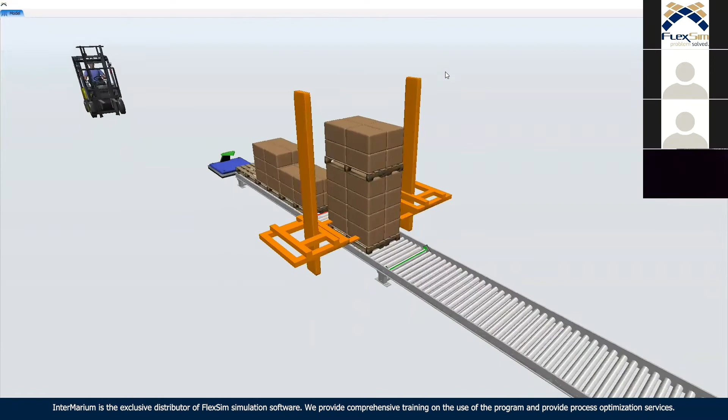Today we're going to do an automatic pallet stacker, load pallet stacker, as you can see on my screen. We'll do it step by step with the process flow, and later we'll post this video on YouTube so you can review it, of course if everything goes well.

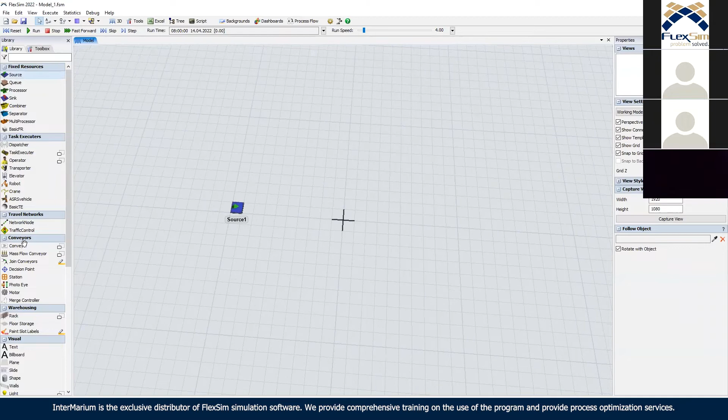So we want to do the load stacker. Let's start from the basics. We'll start with some source, with a conveyor. We'll make some connections, and in our model, we need to have pallets.

So we'll create the pallet in our flow item bin. This icon here on the top, go to the pallet. Let's change it to the Euro size pallet, because Flexsim is an American software, they have the US pallet, not the Euro pallet.

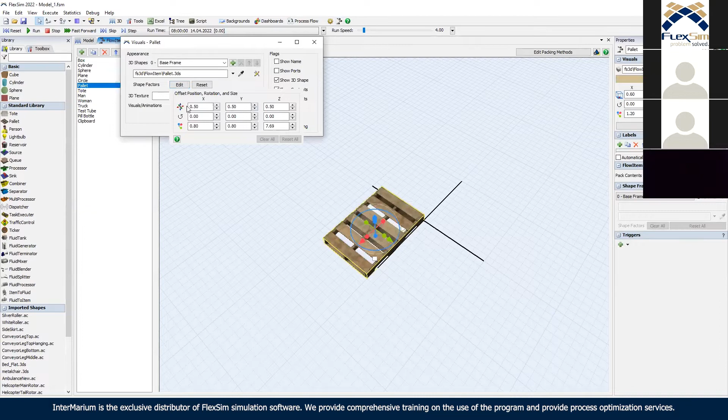Here you can see that when I shrink it, the planks are in the wrong direction. You can easily change it by going to the more visual and editing the shape factors. So you edit the shape factors, and I can rotate it by 90 degrees. Now the planks are positioned correctly.

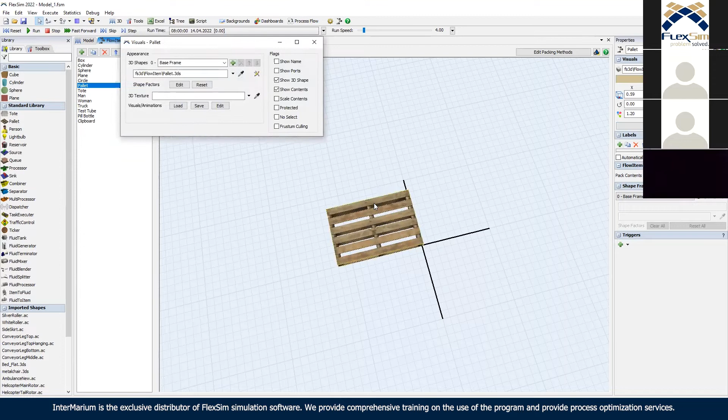By editing the shape factor, you are changing how the 3D shape is positioned inside the frame. The frame is this yellow outline. If you change the size, you're changing the size of the frame, and with the shape factors, you can move the shape freely inside the frame. So now we have our pallet.

Now that we have the source, we can change the flow item class to pallet. I also check arrive at time 0, so I don't have to wait for the first pallet to arrive. So we have the pallet.

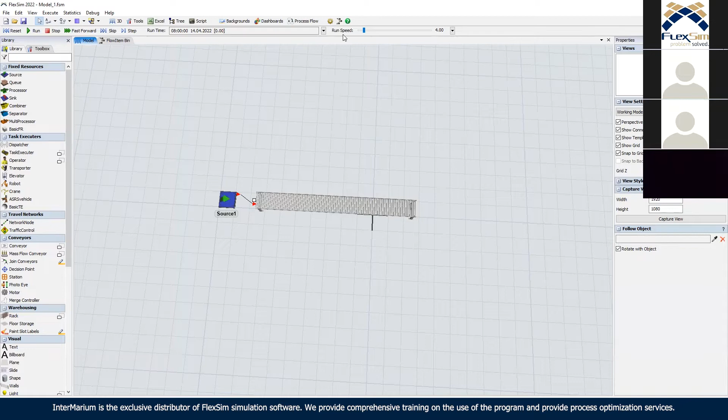In our case, we want to stack those, so let's create this pallet as a pallet with the load. I want to have the full pallet, not the empty pallets. So let's write some logic in the process flow. For example, whenever a pallet passes through this point, through this decision point, I want to create the content of the pallet.

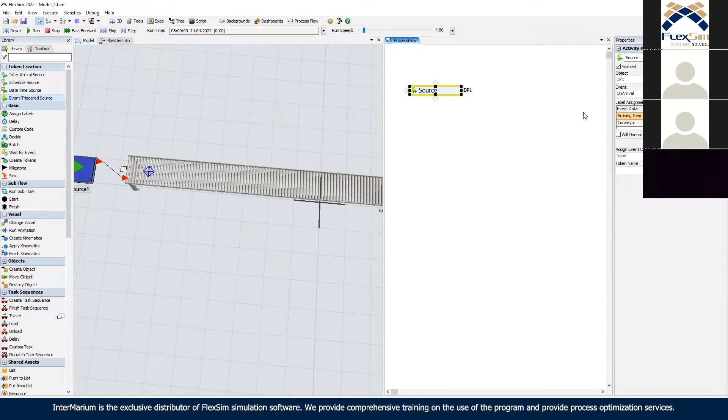So we'll use here the event triggered source. We sample on the decision point, so when something arrives at the decision point, the arriving item, let's call it pallet. So whenever it arrives, I want to create some objects, and it's going to be the content of the pallets.

So I will create some boxes. From start, let it be 8 boxes, and I want to create those on the pallet. I don't need to do anything else with them later, so I don't need to assign it. In the end, we'll use the sink to destroy this token. So now when I reset and run it, I will create the content of the pallets.

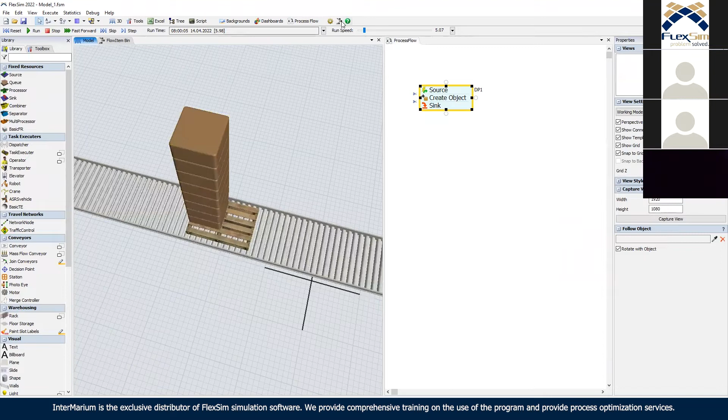These boxes are shaped a little too big to fit on the pallet nicely. So I will go back to the flow item bin and change the size of the box to 59, 39, and let's leave it at 0.3. With this size, they should fit nicely on the pallet, like 2 even layers.

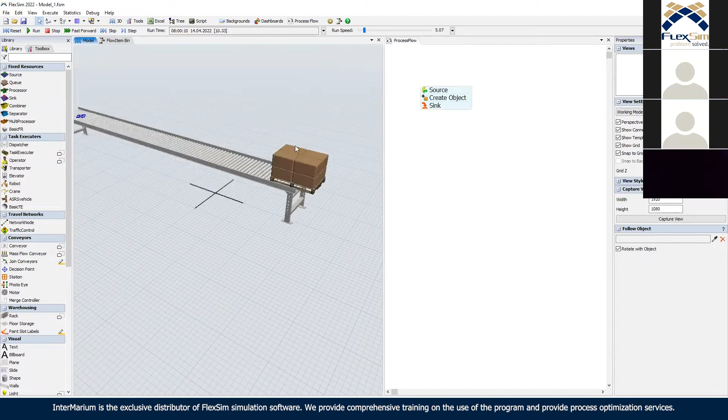Of course, it's important because if I want to stack those, I need to have an even surface that I can stack this on. You need to look out, you need to be careful. If you use a decision point like this, you have to specify here

when the on-arrival trigger fires. So if this is the center, if the pallet moves, if I reset and run this, you see that this logic will fire only after the center of the pallet hits the decision point. This is important because sometimes when you reset and run, in this case it's not a problem because it starts from the beginning, but if you have, for example, a transfer from the side, like here, the center will never reach this decision point. So you have to change the edge to match your layout. In this case, this will be all right.

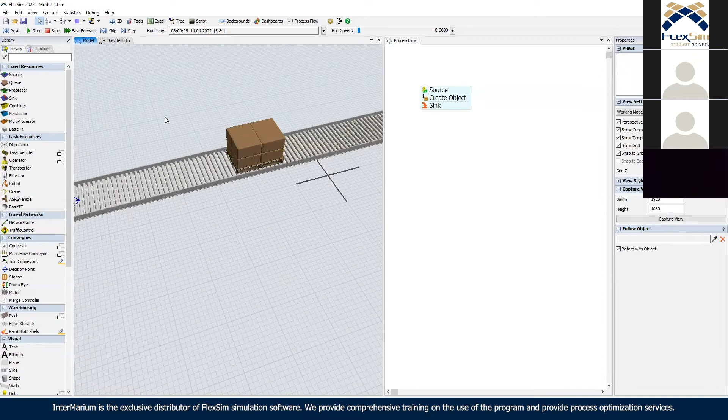So I have eight boxes on the pallet, and now I can start making the stacker. Let's do it, for example, here.

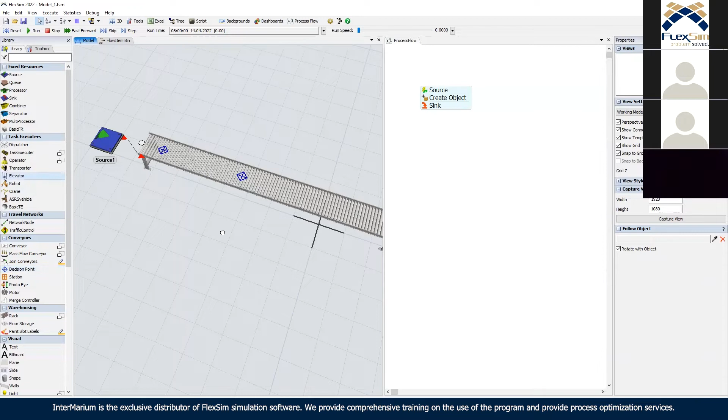So what I need is some kind of decision point where the stacking will take place. In this case, we're going to make the stacker from the elevator. Of course, there are many different ways to do it, but I think this trick with the elevator is the simplest. So let's change its size to be a little more narrow.

We'll move it here. I'll also make this conveyor a little lower, so the leg will be like 0.3 meters, and also change the Z to 0.3.

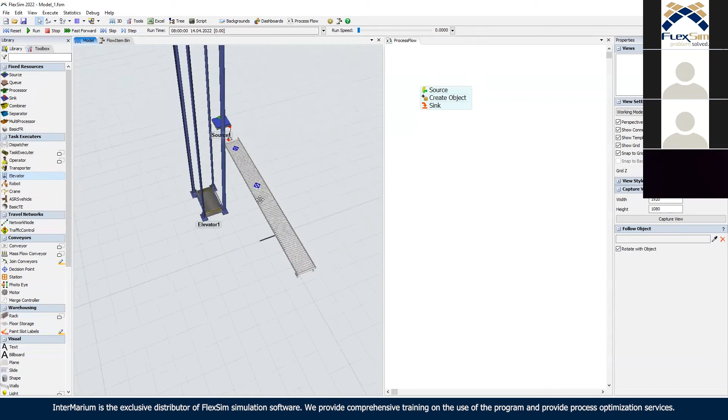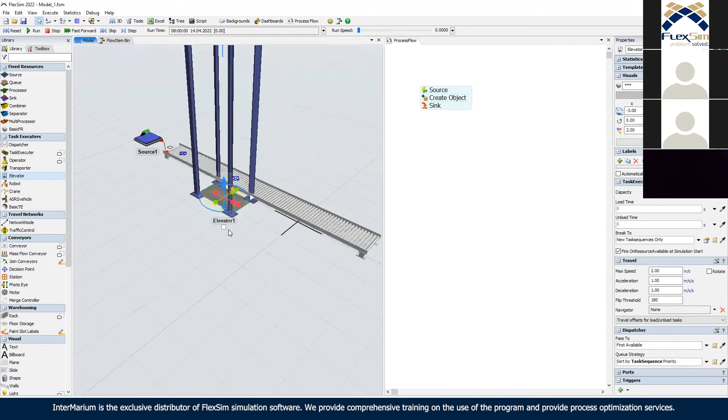Okay, we have the elevator, and we have to make the gripper from both sides. How can we do it? In this case, let's do it with the animations. We're going to name it stacker, and go to the animation options.

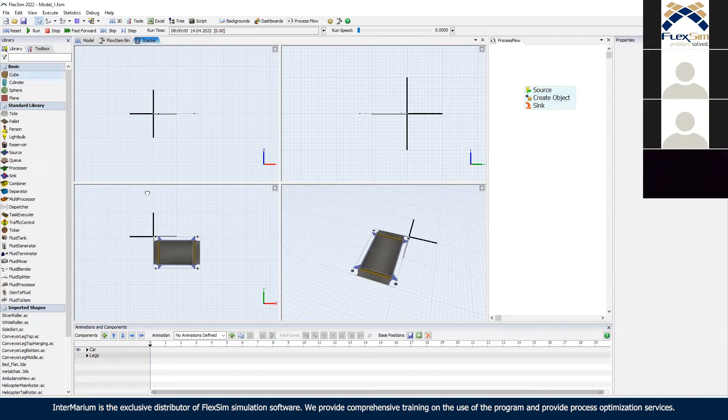Click on the stacker, more visuals, and animation, edit. Here you can create the animations for the stacker. I don't want to see its legs, so I can just click on this eye so it's not shown. And I'll have to make these grippers, so I will drag and drop 2 cubes, and this is important - I will drag those onto the car, so you can see those cubes, those grippers will be part of the car.

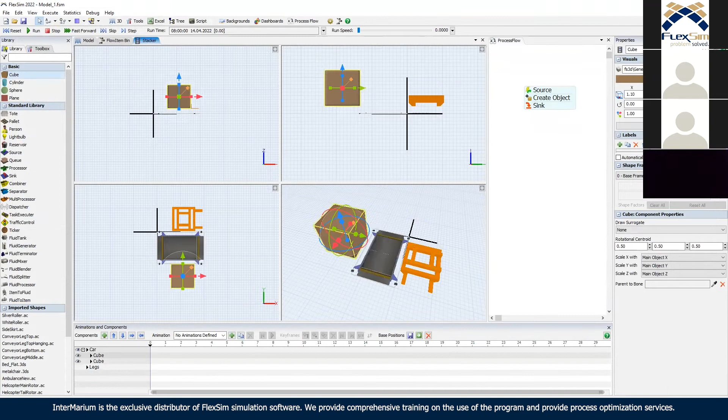So when the car moves, those 2 objects will also move with the car. We change the shape to some grippers, and of course we'll rotate it so we can catch the pallet when it arrives here.

So you can see on the model, you already see the elevator with two grips. So you can say it like this. What we want to do is slide them onto the pallet so you can take it and lift it up. So this is, let's say, the base position.

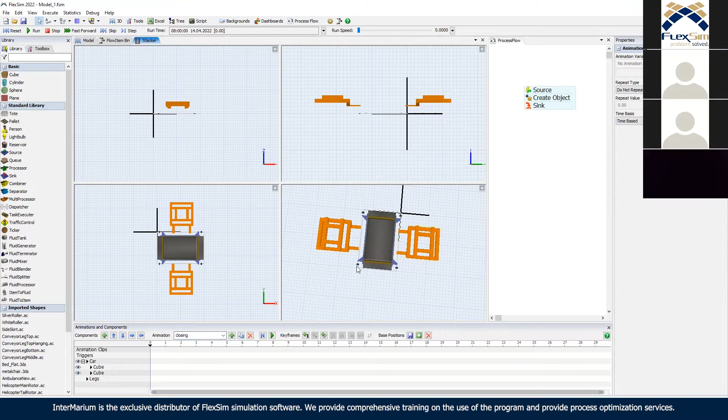Maybe make it even, okay? So we'll make it as a base position. I will save it - this is my base position. I will create one animation, let it be like closing. So I'm closing the grip on the pallet. So I have 2 keyframes.

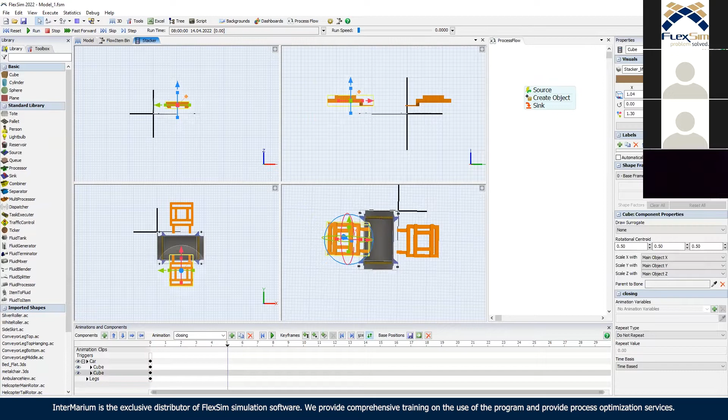This is the first keyframe, like in the base position. And for example, after 5 seconds, I will move it by Y, let's say for 30 centimeters. So 1.6, 36, and here 0.23. And I will save it. So this is some animation for closing the grip onto the pallet.

This is the first animation. Let's create a second animation. But before I do, I will move the shapes onto the closing position. Then when I create the second animation, let's call it opening, I can start with a keyframe. So the first keyframe of the opening animation is the same as the last keyframe for closing. Then at the 5-second mark, I can go to the base position and create a keyframe. So I have the exact movement with the same position for closing and for opening.

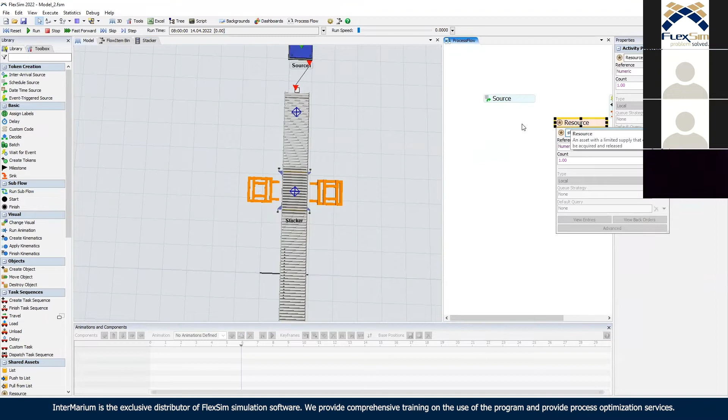Okay, so we can go back to our model, and now let's build the logic for a stacker. We'll start the schedule source, we'll create one token, and we need to have some resource here. This resource, of course, it's going to be our stacker. As a reference, we're going to use the elevator. Later, of course, we will make this platform invisible so it won't be shown, but for now it's easier for us to sample it, to point to it when we see it. That's why it's still there.

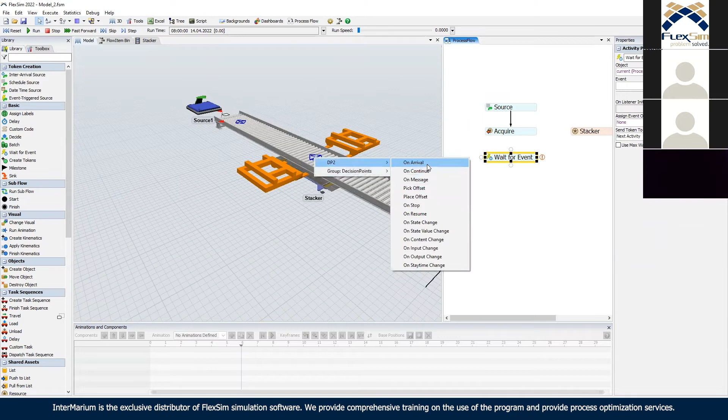We're going to make the acquire, so I'm going to take this resource and let's call it stacker. Okay, and what will be the logic here? We have the acquire and we have to wait for something to arrive at this decision point. In this case, I will name it pallet 1, because I will have pallet 1, the first pallet that I will lift up, and pallet 2, the second pallet on which I will put pallet number 1. So this is pallet 1, and I'm waiting for it to get there.

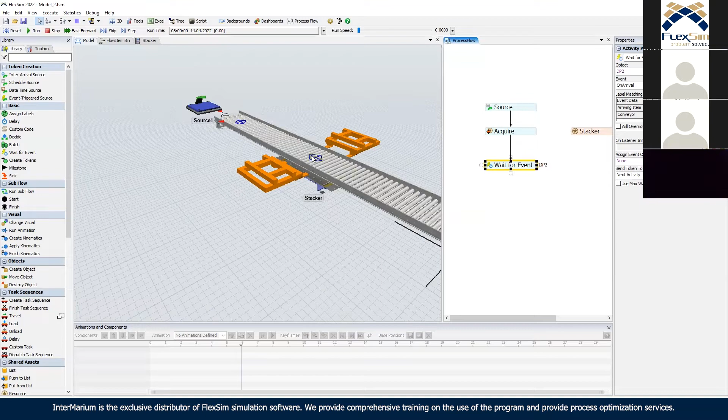When it arrives, I will move this pallet onto the stacker. So I will create a move object here - move pallet 1 on stacker. So my pallet 1 will be moved onto the stacker, and this is what's important - I will preserve its global position.

And thanks to it, if I reset and run the model, when the pallet arrives here, it moves onto the stacker. So right now it's on the stacker, but it still looks like it's on the conveyor. So if I run it more, you'll see that the next pallet, when it arrives, will just go past it, because this pallet is not on the conveyor anymore. It is on the stacker.

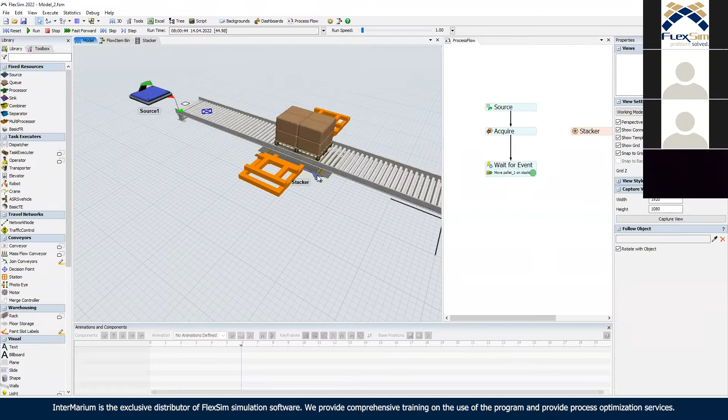So I don't want the next pallet to get here, not before I say so. Yes? So in this case...

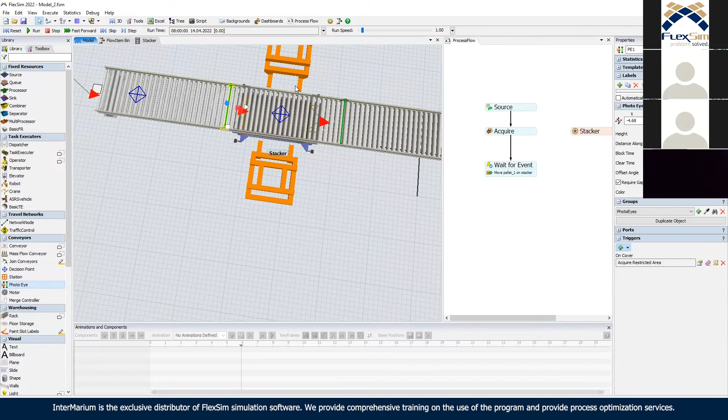I will need to create some area with the photo eye, some zone in which there can only be one pallet. So when a pallet arrives at this photo eye, I will use the logic on cover, and I will acquire the area. The area owner is the current object, connected through the A port with my photo eye. So I will make the connection here. This is the zone from this photo eye up to this photo eye.

So right now, if I reset and run it, the first pallet gets here, and the second pallet will have to wait at this point, at this photo eye, because I didn't free the area or the zone. So it waits here. Now I can do all sorts of manipulation with my pallet.

Okay, I have the pallet in place. It's already on the stacker. The second pallet waits, so I can close the grip on the pallet and I can lift it up.

So let's run the animation. You can have the run animation block here. Let's call it closing. So it's going to be our animation for our stacker, animation number 1. You can reference the animation by name or by rank. So rank 1 means the first animation, closing, or the second animation, opening.

So I can just leave here 1, and I can define also here how much time the animation will take place. If I don't set anything, it will take 5 seconds, because here is 5 seconds. But if I choose use duration off, I can write whatever time I want. So for example, I write here 4 seconds. And I will make the token wait here until the animation is finished, so I don't want to continue my logic, not until I finish the closing.

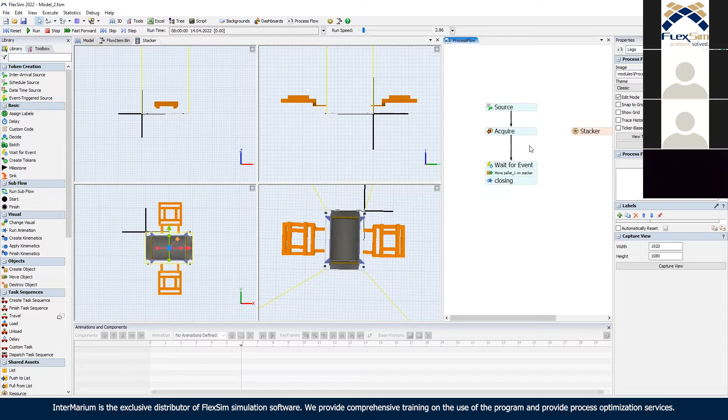So let's see how it works. And I'm closing. I've closed the grip, so now I can lift it up.

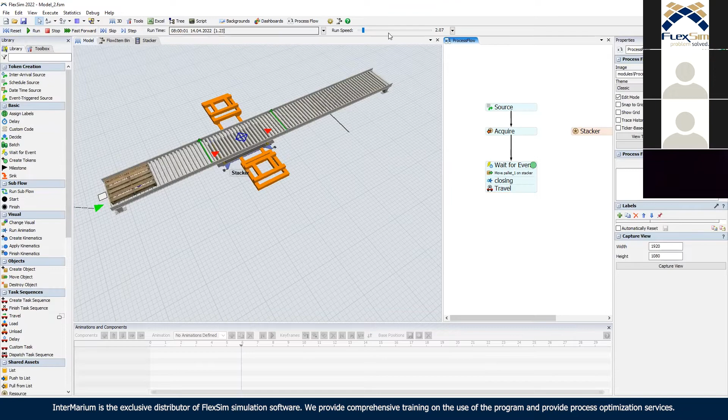So I can use the travel to location to move the elevator, in this case the stacker. I will use the relative option, so I will lift it by, for example, 2 meters. So now after the closing, I will lift it by 2 meters. You can see it's not aligning perfectly here.

So I can make some corrections by increasing the initial height of the elevator. So now if I reset and run, the gripper fits nicely into the pallet. Of course, there's another way to do it, but I think this is the simplest one.

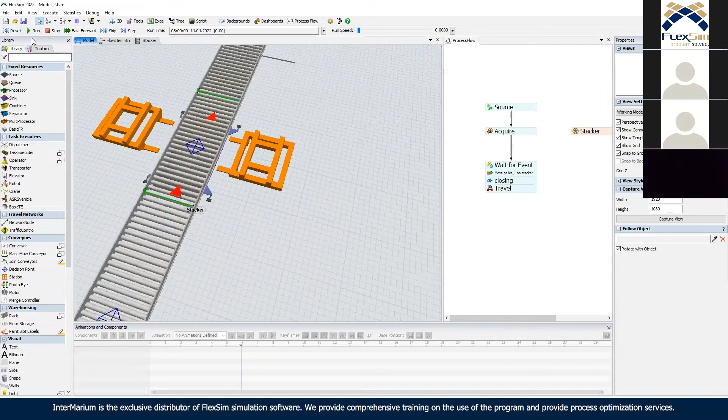So we have the pallet, the pallet is full, the pallet is taken by the stacker, and the pallet is lifted up to this position.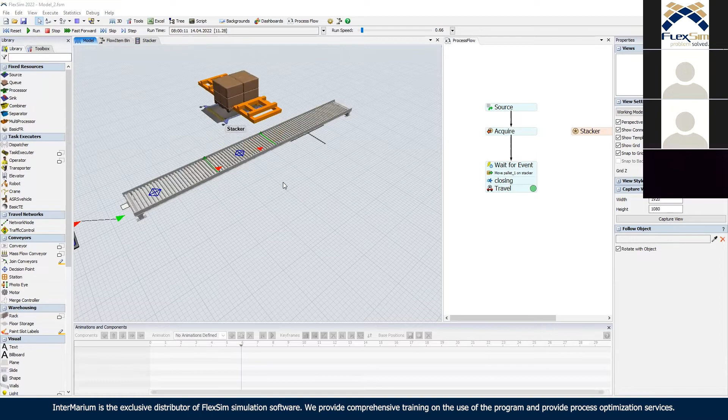Okay, so what we need to do now is let the second pallet come here, because this area is still occupied. This pallet acquired this area, and I've never released it. So after lifting up, what I want to do is release this area, so the next pallet can move up to this position, so I can lower this pallet down.

Okay, so I need to release the area. How can I do it? I can check the logic—for example, here on the second photo eye, on uncover, I'll have the logic to release the area. This is the logic, because when the second pallet moves past this photo eye, I want to release this area, but I want to do it like every second pallet, because I will release only after a stack of 2.

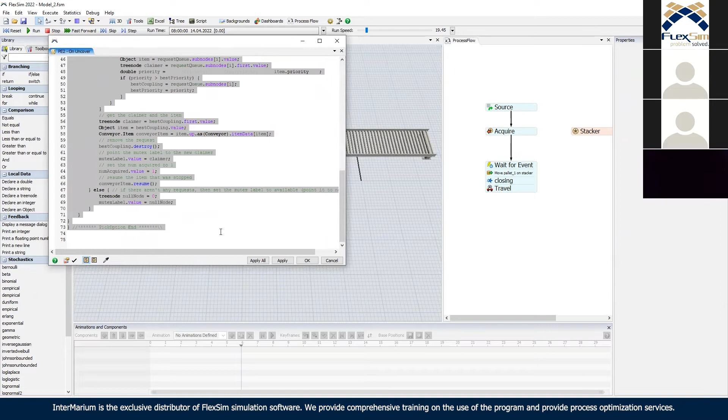So I need to use this code in my process flow, so I can release this area when I lift up the pallet with the stacker. So I can just copy this code from the pick option start to the pick option end, without the headers here. And I can create here the custom code. Let's call it 'release area' and paste this code here.

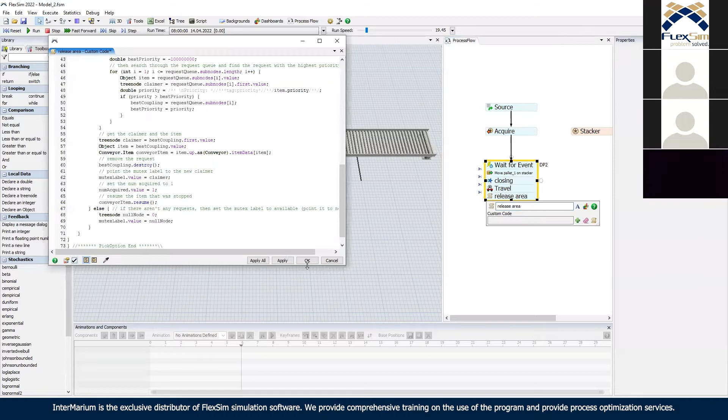I need to specify the area owner because in this case, area owner was current. Current in this case means me. So the object when this trigger, this code is... so this is the photo eye, but in the photo eye, current means something completely different because current means the process flow itself.

So the area owner, I will specify with the simple Model.find. Now if I reset and run it, I move it, the area was released, so the pallet can pass. Of course, I still need to stop it somehow because I want to wait for it, so I can lower the pallet onto it.

So after releasing the area, I will create another wait for event, connect this with the decision point on arrival. But in this case, it's going to be pallet number 2, so the second pallet and assign.

In this case, I won't move the second one onto the stacker because I want the second pallet to remain on the conveyor. So I will just stop it — stop the pallet 2.

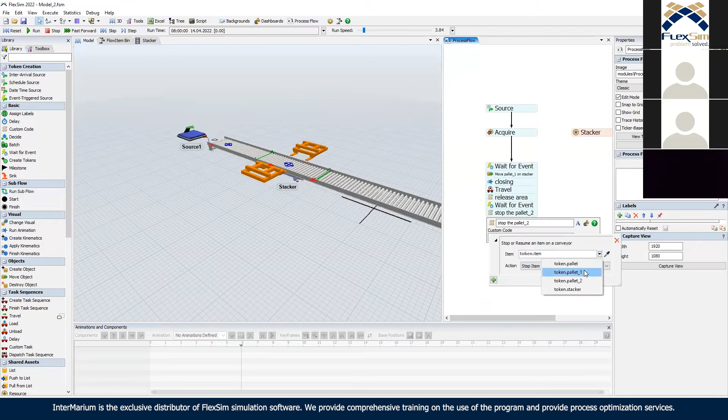So now if I reset and run it, leave the first and the second is here. Okay, maybe I write here, like for example some 20 seconds. I don't have to wait as much time for the second pallet. Okay, so we are here.

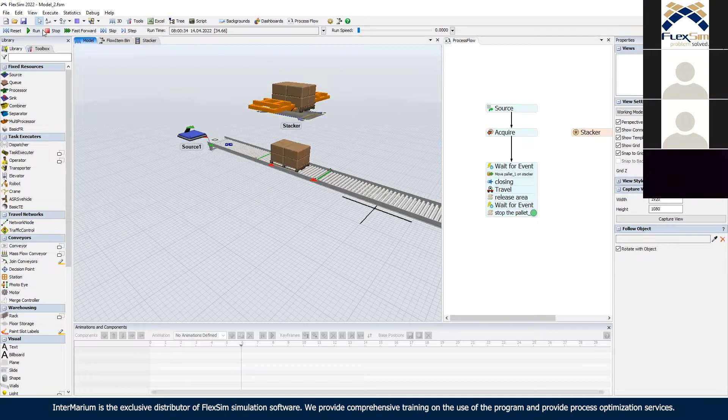So now I have to lower this pallet onto this one. I have to calculate how much space is from this point to this point, because I need to know — right now we have a constant number of boxes on the pallet, so it's all the same, but later we change it, so I'll have some random number of layers here, and I will never be sure what is the height that I need to lower myself onto. So after stopping the pallet, we will calculate the height.

So we use the assign labels to calculate the height of pallet 2. Yes, we have to calculate the height of this pallet. Let's call it pallet 2 height.

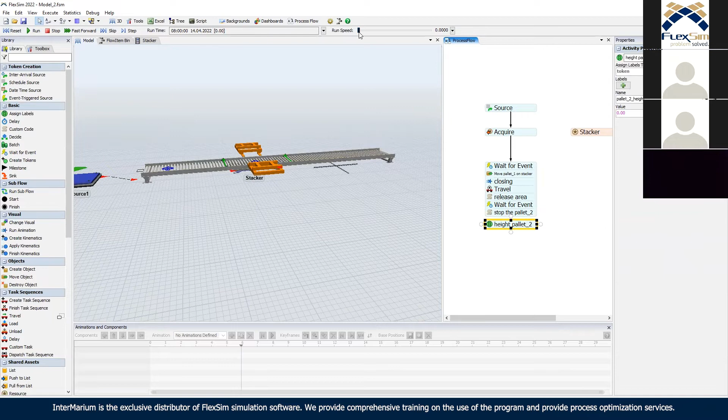And what would be the value here? So I need to get the location, maybe just to show. To calculate the height of the pallet, I need to get the location from any box from the last layer. So this will be the location and the size of this box.

So in this case, it's going to be token dot pallet 2 dot last — this is the last box onto the pallet, so I need to have its location. So location Z, and you can see it didn't color to purple because I need to specify that I want to treat this as an object, so I can have access to the functions and methods from this class. And this is going to be the class.

And the size for Z — so this is the pallet 2 height. Of course, I could also use the get location function to get me the location for this point, but I think for me this is a little bit simpler, so I can use the base functions. Okay, so now I know the pallet 2 height.

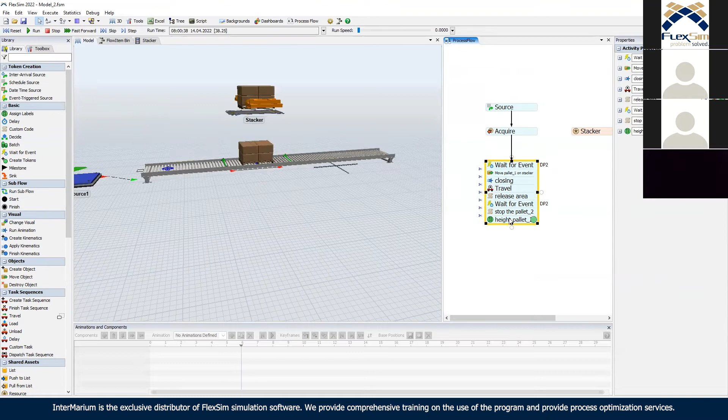So if I reset and run it, I can go to tokens. I know it's 0.73. So I have two boxes: 0.3 this, 0.3 here, and the pallet is 0.13. So 0.3, 0.3, 0.13 — 0.73.

So this is okay, so now I can use the elevator to travel to this location. So we can use again travel to location, so our stacker. Okay, we'll move relatively to the initial location — where I am right now — so it's going to be token dot stacker dot location dot Z minus the height of the pallet.

So token dot pallet dot pallet 2 height. Okay, and we'll see if this works. Reset, save it. We'll see how this works. It won't work as intended, and in a moment we'll see why.

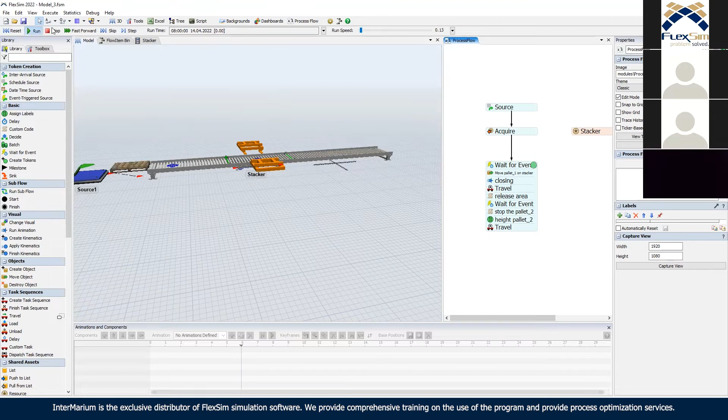You can see it goes higher. Why? Because the result of the equation is with the plus sign, so it goes higher. I want to have it with the minus sign, so I want to go lower. So in this case, I will multiply everything by -1. For example, if the location is 3 meters and the pallet height is 1 meter, 3 minus 1 is 2, so go 2 meters higher. But if I create it with -1, go 2 meters lower, so -2. And we'll see how this works.

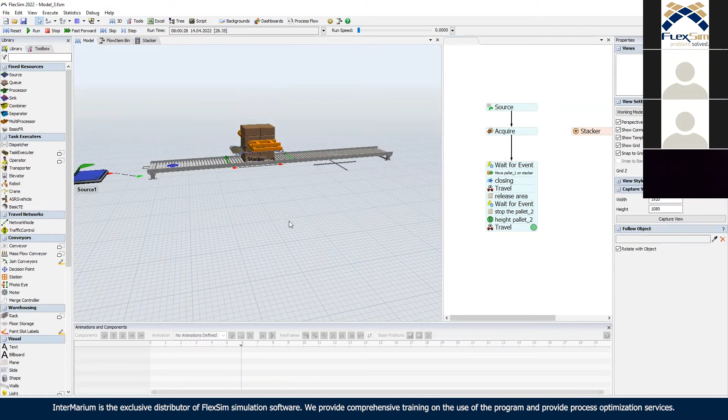And the second pallet. You can see I'm moving myself a little bit too low. Why is that? Because I have some initial height for the elevator, 0.15, and this is initial height for the stacker. So I need to take this into consideration.

So let's put stacker initial height is going to be 0.15. So I need to make the correction here. So plus token dot stacker initial height.

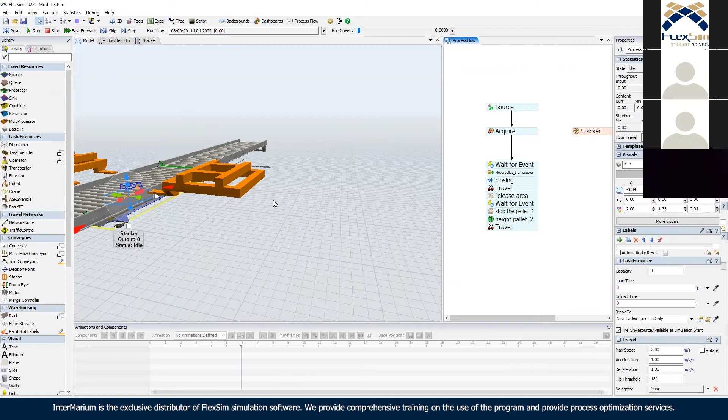So now if I reset and run it, you can see it's the exact position. You could also do it without the relative movement, but in this case the relative movement is a little bit easier, especially when you have multiple stackers on multiple different levels. Yeah, because this is a little bit more universal.

Okay, so I'm in position. I've stacked those, but for now this pallet is still on a conveyor, and this pallet is on the stacker. If you look at the tree, this is the first pallet, and the second is still on the stacker. So this is the second pallet here. So they look stacked, but they are still on two different objects.

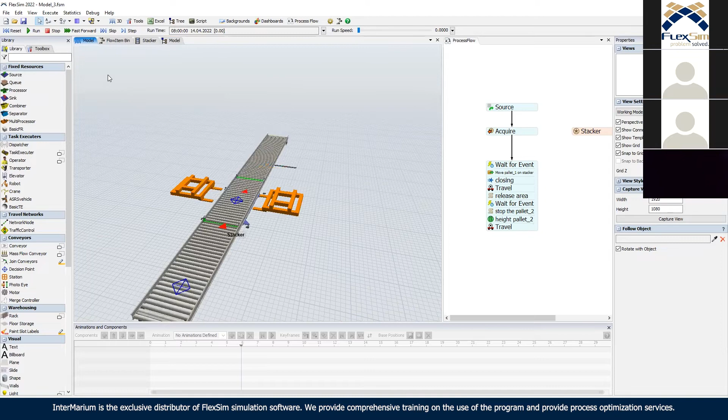So in order for this to work, I need to move the first pallet onto the second pallet. So in this case, again, I will use the move object: move pallet 1 on pallet 2. So I have to move pallet 1, the one from the stacker, onto pallet 2. And again, important, you need to check the preserve global position.

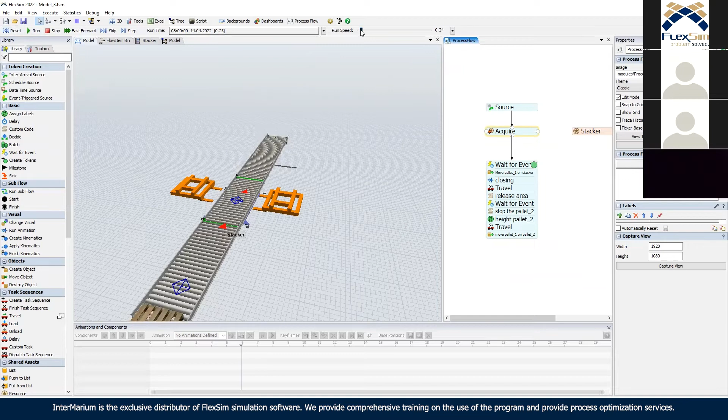Because if you check it, pallet number 1 will remain on the same position, and we position it right on top of pallet 2. So you don't need to do anything else to position the pallet. So if I reset and run it, now when you see on the model, the pallet has 2 pallets and the boxes.

Now we created the, let's say, the tower. We moved it here. So our next task will be to open the grip, to move those 2 grippers. So again, we'll use the run animation for opening. It is going to be for our stacker, second animation, wait until complete, and provide it 4 seconds.

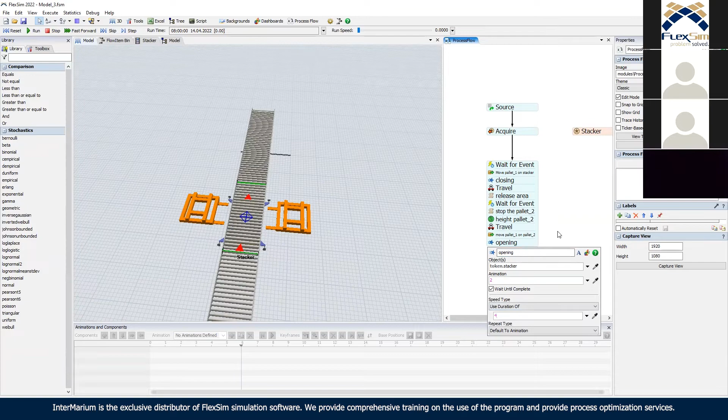So now when I reset and run it, we see the gripper moves aside. So after I move to the side, I can lower the elevator to the base position.

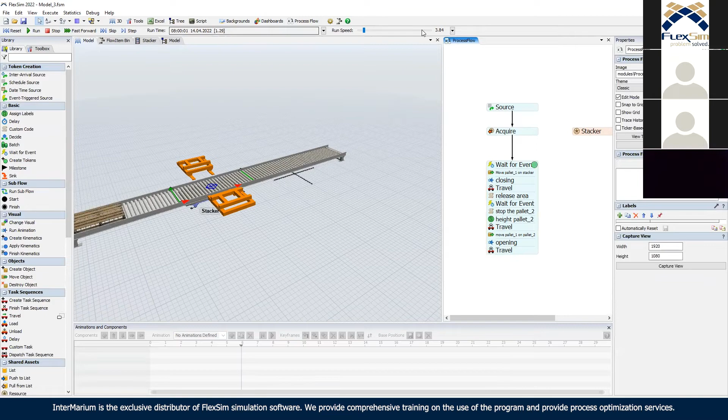So I can again make the travel to location and move the stacker to the label stacker initial height. So now after opening and putting the part, I'm right when I started.

So I'm right there, so I can now release the pallet. So I will use the custom code again to resume pallet 2. So control conveyor, stop and resume item. So you have the pallet number 2, resume item. So if I reset and run it,

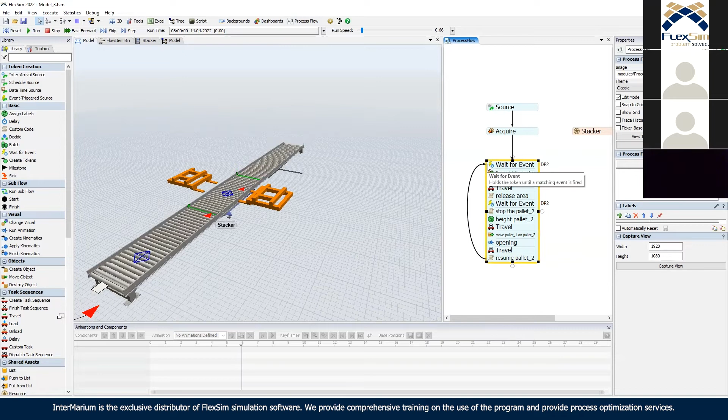I will create a stack and move it. But it won't work for the next pallet because I didn't loop it. So now after I complete everything, I can loop it like this. So I'm again waiting for the pallet to arrive to repeat the cycle. So let's say in one cycle of this resource, I will always take two pallets. So reset, run.

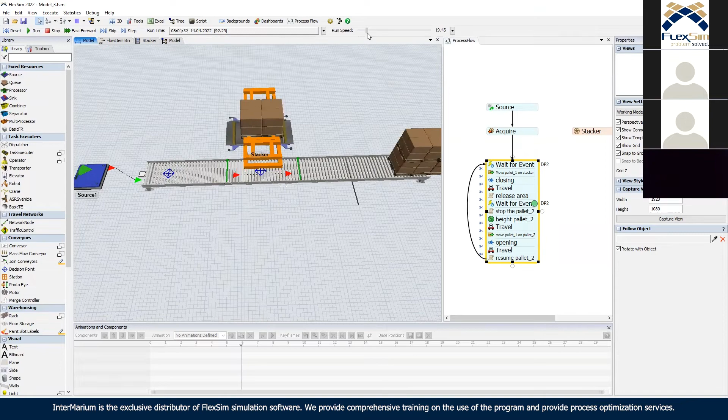Lift it, put it down, grip on positions. And the same. Okay, so we have the base.

Let's make it a bit harder because let's say each of my pallets has a different number of layers. Okay, so we can change the logic here. And let's say

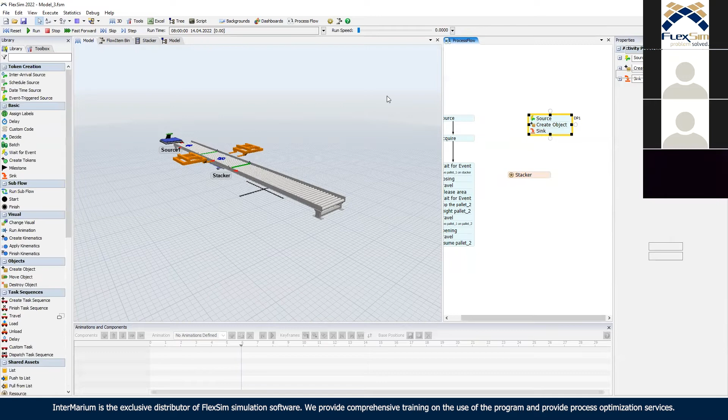our pallet has some random number between 1 to 4 layers. So we write here as a uniform distribution, yeah, multiply by 4. So you can have 1 times 4 is 4, 2 times 4 is 8, and so on. So now I will have some random number of layers.

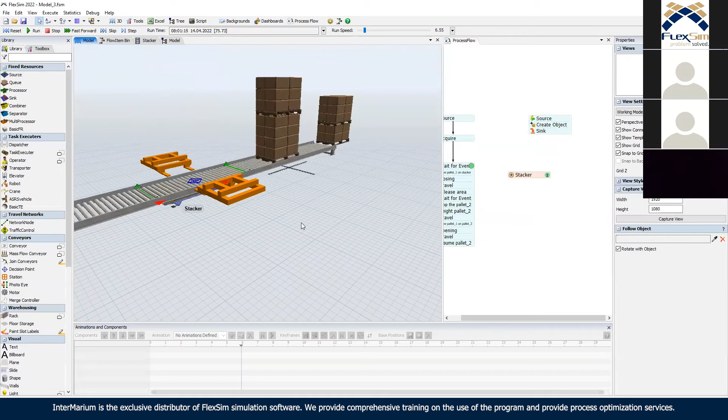Because we are using the relative movement, it should work regardless of the number of layers on each pallet. So you can see our pallets are always, let's say, perfectly stacked. Okay, 4/3, 2/4, 3 or 4/3, multiple different scenarios, and everything here works. Okay, so we have it. It works rather good.

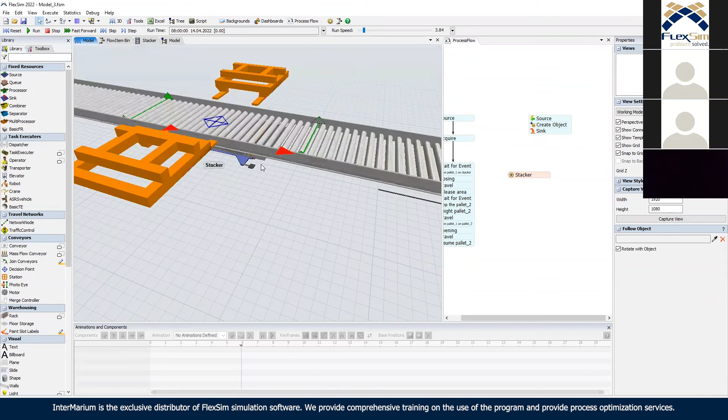What do we change here? In the small GIF you receive in the invitation, you will see that we have some pillars here, and of course we don't see the stacker. So we don't see this elevator here. So we can go to more visuals, animations, and just click this eye icon on the car.

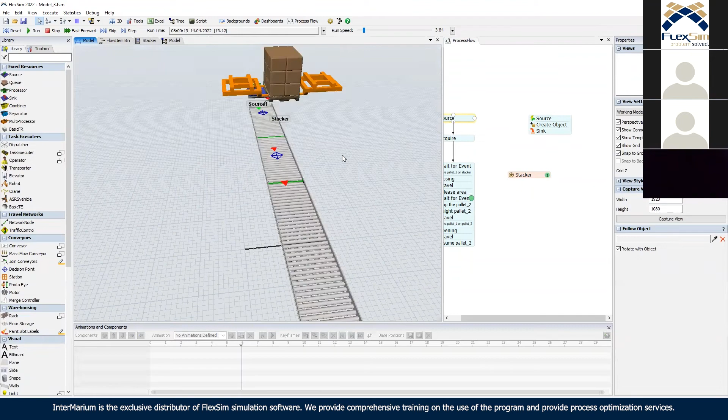So now on our model, we don't see the elevator platform, so it seems that only the stacker is moving. You can also see that I create some pillars, and this is rather simple. I've just used some basic shapes, changed it to the basic FR, to have the pillar shape.

Make it small, make it also orange, so I can sample this color. Make it higher. And have it here.

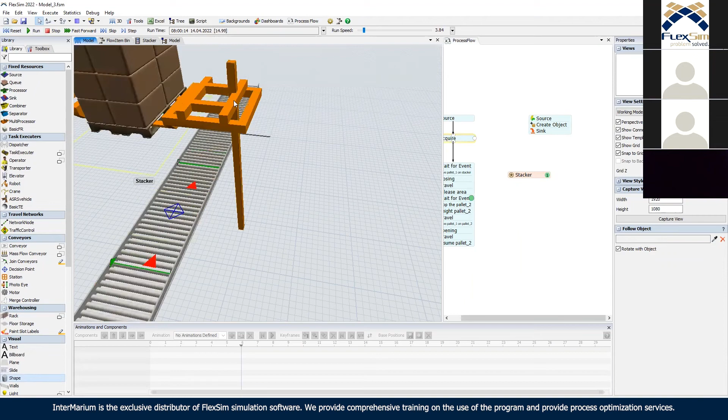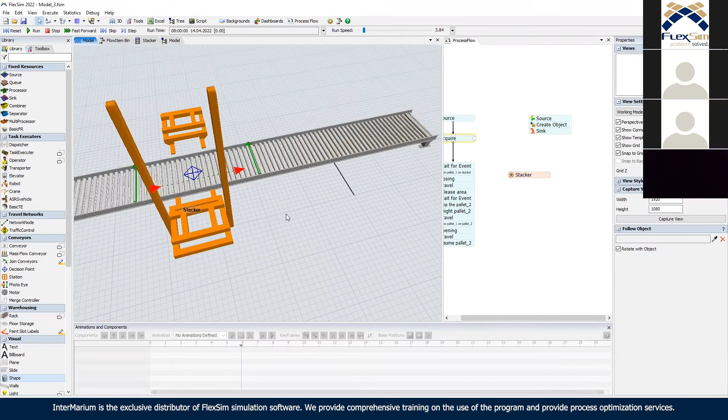In this case, it won't really be exact because the movement here is bigger than the gap here. Yeah, but it only depends on the size of the object and how you would like to do it. Yeah, because you could also create these pillars on the side, or depending on how your stacker is looking. You can also, of course, import the frame of the stacker itself if you have some 3D models available for your disposal.

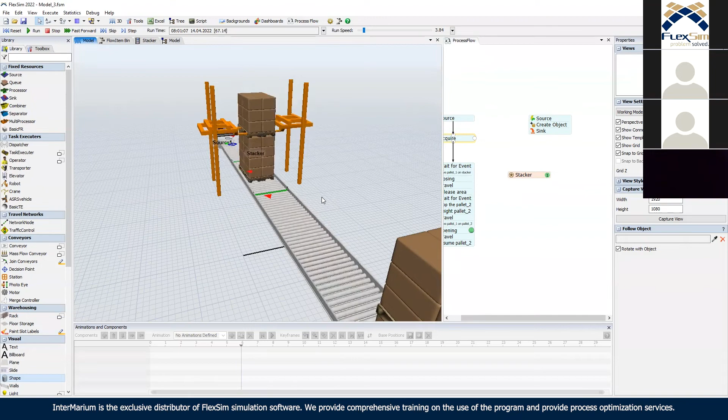Yeah, so we can also copy it on the other side. Reset run. So you can see it wasn't that hard, yeah. We especially did this webinar because we received a lot of questions how to do it. So let's say it looks nice, it looks good. Yeah, so it represents them accordingly, especially when you have a different number of layers for different pallets.

So why do we use an elevator here? What's the point of this trick? Let's call it like this, some kind of trick to make it easier to build this faster. Because I need to remove this pallet from the conveyor, so I can move the next pallet into this position.

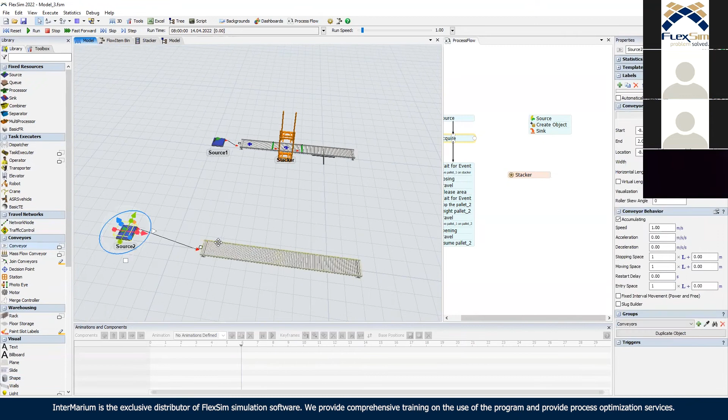You have used that, try to do it with the translate options. So what I mean by translate - when you have the source, you have the conveyor, you could use trigger, for example, on the station.

So try to make the stacker of the station using the on arrival, and here the logic for movement and for translate. So you can lift something over time, for example, 5 seconds or 4. So in this case, when you reset, run it...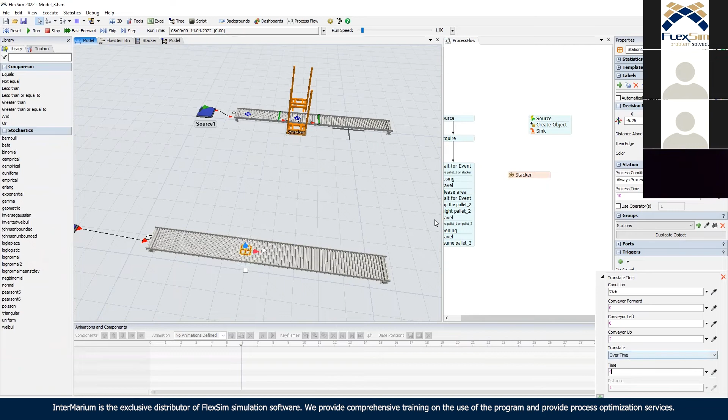When the pallet will come here - give me a sec - pallet arrival at time 0, so when the pallet will come onto the station, you also lift it.

But you won't be able to have the pallet on the conveyor underneath it, because this pallet still remains on the conveyor. So by moving this pallet onto the elevator, I'm removing it from the conveyor, creating a space, a possibility for the different pallet on the conveyor to move beneath it.

And I'm using the elevator also because with the elevator, I can very easily create the logic for lifting and for lowering. I have the elevator and this is a built-in logic in the elevator. The elevator is created for lifting something up or lowering something, so I can use this elevator.

I can use this travel to location. I can easily use the elevator with the acceleration or deceleration, the speed. So I can rather easily parameterize it here. And it works very well.

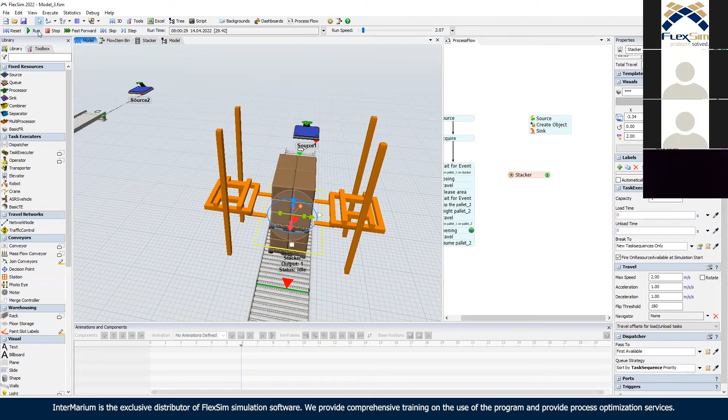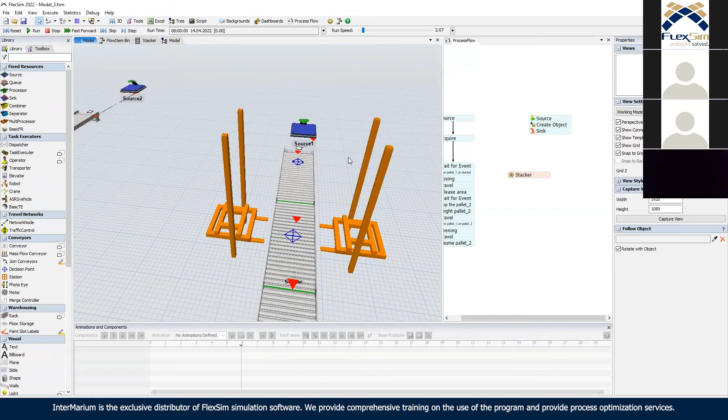You could also, of course, do it with some kinematics here, but you still need to move it outside the conveyor so you can create the space. And using kinematics on the conveyor can give you some troubles with the movement of the object on the conveyor after doing some custom kinematics to it, and you need to clear all the kinematic subnodes to make it work.

So this is a rather easy way to do it, rather universal. You can give here a lot of different pallets with different sizes, with different heights, and it looks very nice.

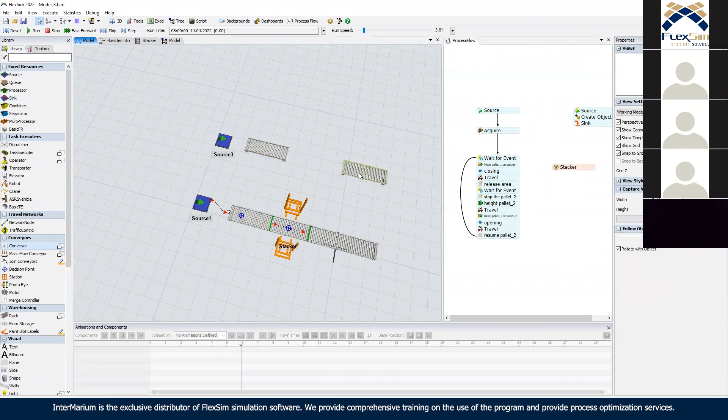Of course, if you don't have that much time and you still need to do it, you could do it in, let's say, a very basic way, just with two conveyors - two conveyors with a combiner in between. So I'll put a small combiner.

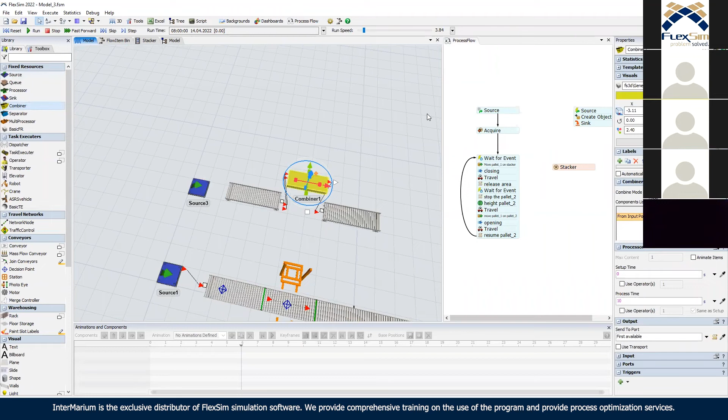You can just connect twice the same conveyor to the combiner, and specify to pack it by one. So in the end, you will have, let's say, the same result - you'll have the two pallets stuck on each other, with some process time, for example 20 or 25 seconds or something.

So after you have two pallets - sorry, I didn't change the two pallet - after you have the two pallets, you make them stack, and after 25 seconds, you move them along the conveyor. So you have some possibilities to represent the same process, but of course with much worse visualization, and it's not the exact same thing, yeah?

Because, for example, here you can more easily model different times for different heights of the pallets, for different numbers of layers, and with this approach you'll have to write some equations here to compare the height of the previous palette and so on.

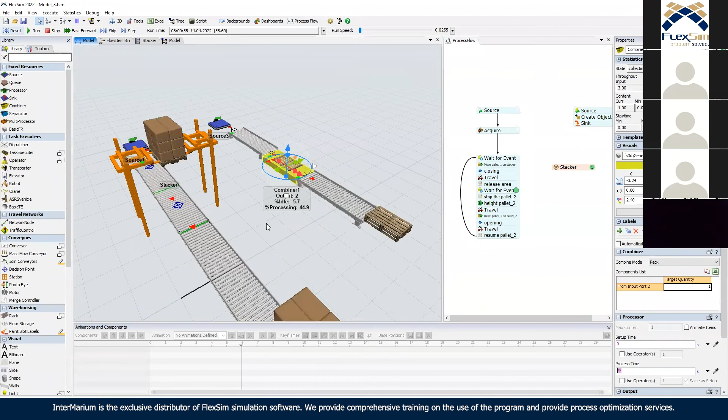Some important things that you may need. So in this case, we use here for the initial lift, I specified it's 2 meters.

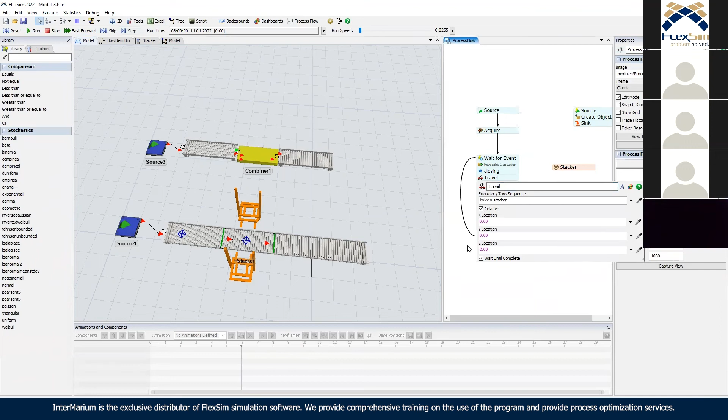But sometimes you need to, sometimes you would like to change it. The height here will be different depending on what is the height of the next pallet. So in this case, you need to get the address for the next pallet. What is the next pallet? And if it happens, if there is some pallet like this, you could shrink it, for example, like this.

And then after moving the object, you can just check the next pallet with the simple sampler. Because then the pallet here will be the last, the first for this conveyor. So you could write here that this is going to be next pallet. So you can predict, because you know what is the next pallet.

And the next pallet is going to be from this conveyor first, because you've just removed the first pallet on this conveyor, because this conveyor is as long as, so this conveyor finishes when the stacker is finished. So this is also a very easy way to check what is the next pallet or what is the height of the next pallet, of course, if it exists. In our case, you never know if you have the next pallet.

So you can also check the content of the conveyor, because if the conveyor has no pallets, this will return you an error because there isn't any first object on the conveyor. So you get the error. But if you need this, this is the way how you could do it.

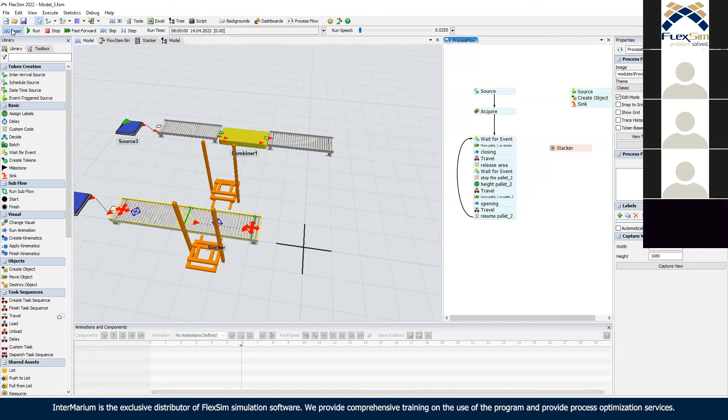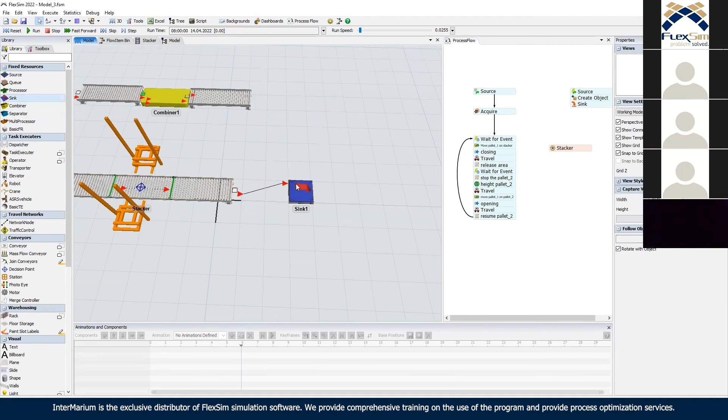And of course, then you need to create a second conveyor to have the fluid movement. Let's make it bigger, 8. And of course, later something, maybe 20 meters, so we can see it better.

Reset, run. And everything is working. So in the end, as you can see, it wasn't that hard. It's important to know the trick. So think about how do you want to build it before you start building it.

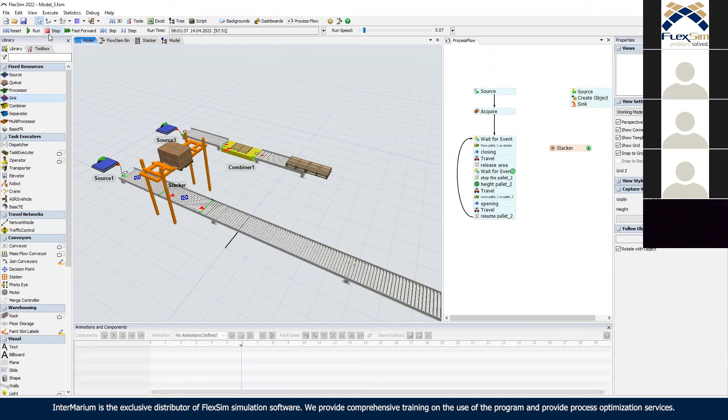So I think this is everything for this subject, for the automatic load pallet stacker. And what can I say? I'm open for your questions right now. So you can ask the question about the model or maybe about some different FlexSim matters.

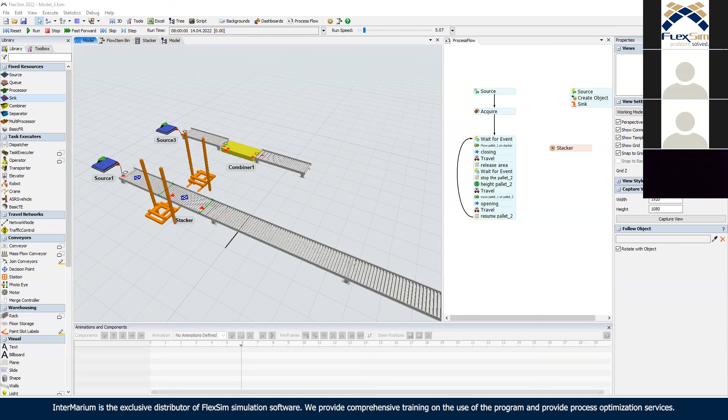Yes, we'll try to. The question in the private message is about the shape. Yes, I think we'll provide the shape with some links, because this is the shape I've done with SketchUp. So we'll provide this shape in a link under the description of this webinar when it reaches YouTube.